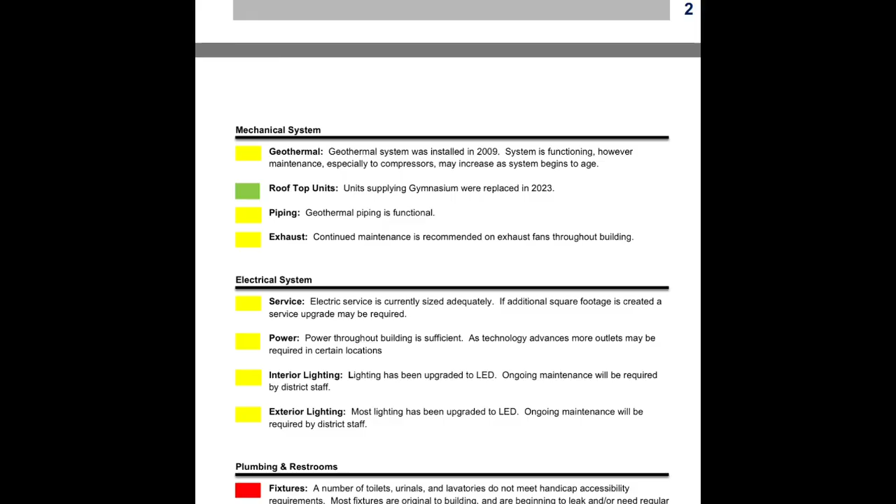Another helpful resource in the document library is the Facility Needs and Completed Items document. Again, from the document library, under the subfolder of Facility Assessments and Planning, we're looking for Facility Needs and Completed Items. This is an internal working document used by administrators and directors, and it's shared with the Board of Education on a quarterly basis. It tracks both remaining facility needs and wants, as well as projects that have already been completed across the district. That context is important.

This conversation is not beginning because the district has ignored its buildings. It is continuing because responsible facility planning requires us to keep addressing immediate needs and also looking ahead to longer-term questions. The completed list within the document varies in size and scope.

Some of the items are more routine. Others involved safety upgrades and equipment replacements, building improvements, and larger capital projects. Taken together, this document reflects the ongoing efforts to provide a safe, functional environment for students and for staff.

At the same time, completed projects do not eliminate the need for future study or work. The stronger and more accurate message is that the district has continued to maintain and improve its facilities while also evaluating whether or not a long-term solution is needed at the grade school, especially in light of a growing community and a growing enrollment.

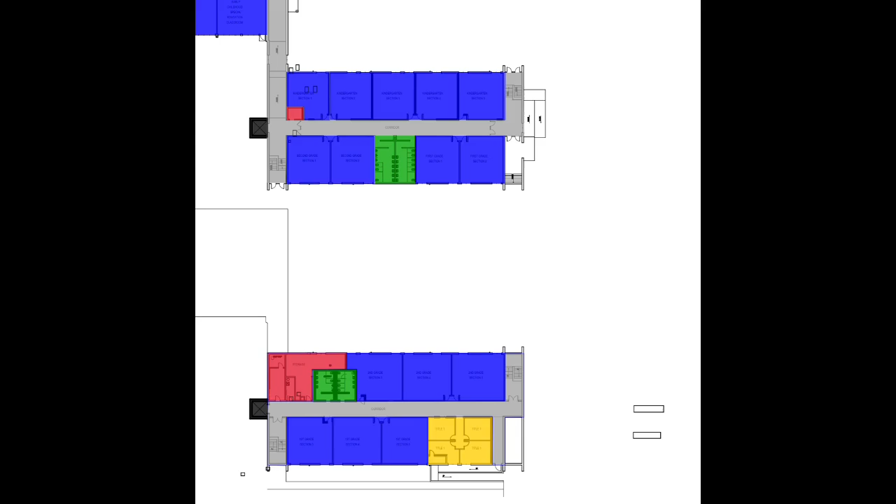In the top right-hand corner, you can see a color-coded key that helps individuals better understand the individual locations identified within the building.

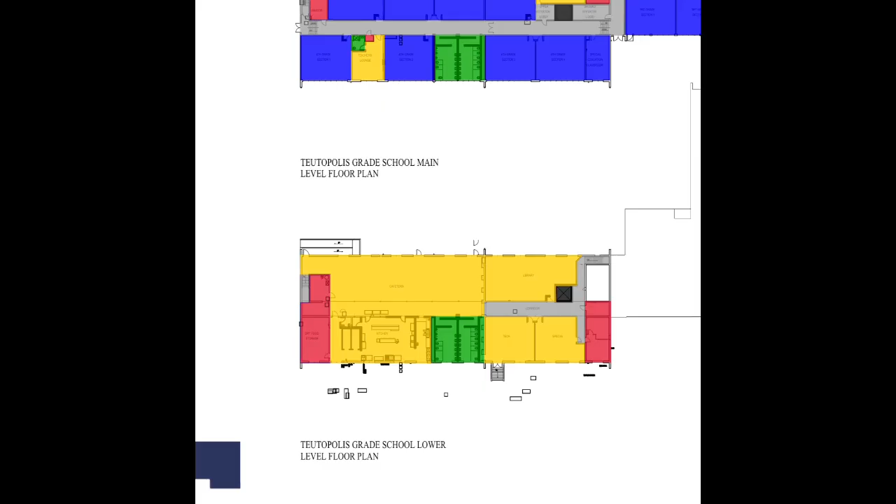This option primarily addresses spaces needing attention as determined through the district building assessment and prioritization document previously reviewed. It addresses restrooms, ADA accessibility including elevators, classroom space, safety, and building systems, namely plumbing, electrical, and water. Some areas would not be addressed and would remain largely unchanged. For example, option A maintains the existing footprint of the structure with no additional expansions and no renovations outside of the existing walls. The advantage of option A is that it would provide one possible scope for addressing needs identified while helping the board understand the cost and project impact. Its limitations are because of its narrowed scope. There are some needs that would remain outside of the ultimate scope of work.

The board has continued to study this $10 million option A because it provides a point of comparison against broader renovation concepts. Back within the document library, let's now select option B.

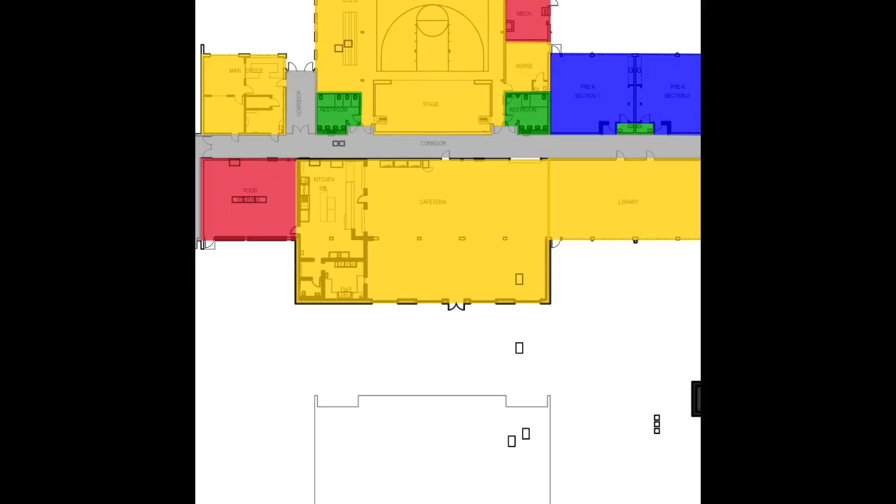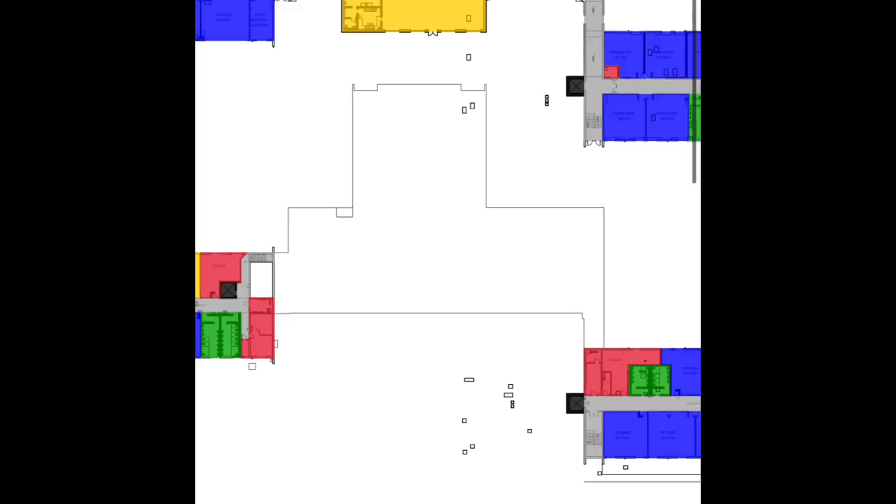Same color-coded key, similar building layout, but there are some modifications within this option. Option B includes all of the previously identified items discussed within option A, but it also relocates common areas to the center section of the building. If you look at this northern section or main floor section of the facility, it's currently used as educational classrooms. In option B, the cafeteria, kitchen, and library are relocated to the center section of the building. Classrooms currently located in this section are moved to the west end of the basement. That means classrooms, the blue boxes, would exist on both the upper and lower sections of both the east and west portions of the building, and common or shared spaces used daily by all students would be centrally located.

The advantage of option B is that it would allow the board and community to consider a different balance between scope and cost. The number of identified areas of need would be increased, but there would still be potentially some areas that would not yet be addressed. The board continues to study option B, an estimated $12 million project, and compares it to the scopes of work and costs in option A.

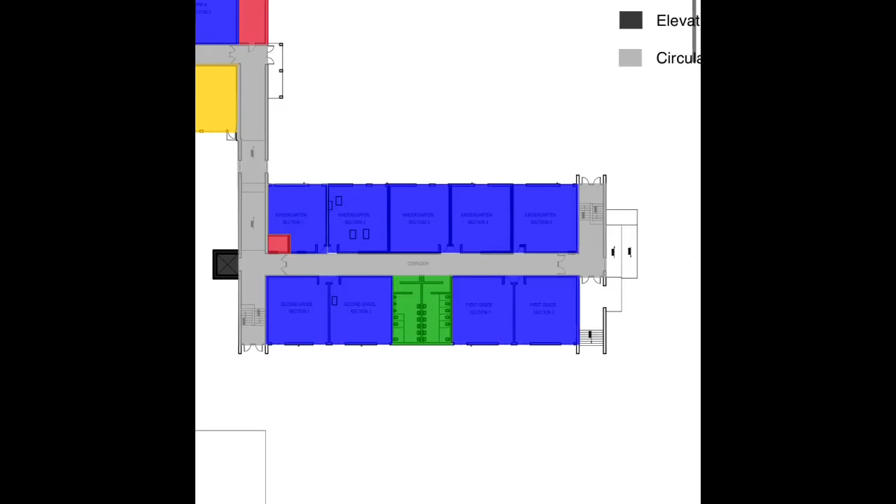Option C is also accessible within the document library. Option C includes all of the same scope of work identified within options A and B, and further expands the gymnasium and auditorium space. Like option A, this facility would include restroom renovation, classroom renovation, addition of elevators and ADA accessibility. It also includes option B's relocation of the cafeteria and library to the center section of the building, and now expands off the gymnasium east and west. This expansion allows for the existing restrooms to be captured and the auditorium and stage space to be expanded. This would relocate restrooms to the west in the existing office, pushing the office out towards the front of the gymnasium elevation. This would also allow for the creation of two additional classrooms to the east, currently identified as preschool classrooms, making it more convenient for early childhood and preschool students to access our facility.

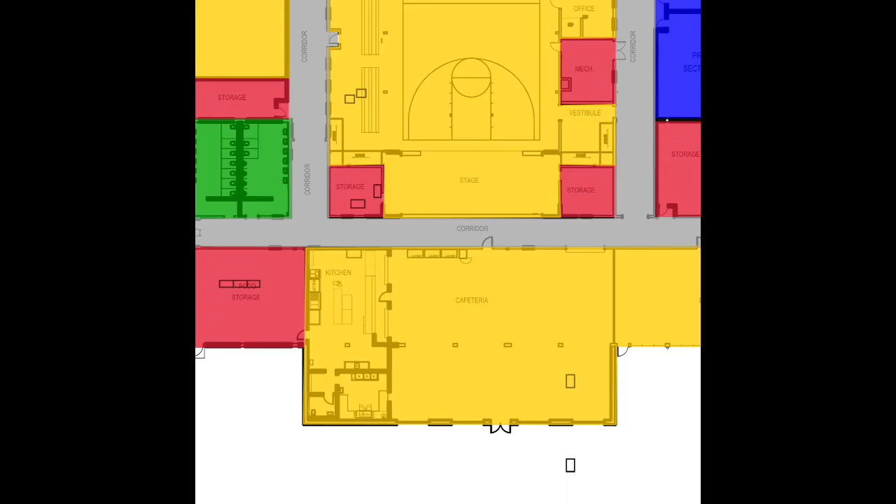Admittedly, option C comes at a cost. It does expand the existing project and scope of work, but at an estimated $15 million price tag. The board continues to study option C because it helps frame the full range of possibilities being discussed, but must also consider affordability, timing, taxpayer impact, and future generations of Wooden Shoes.

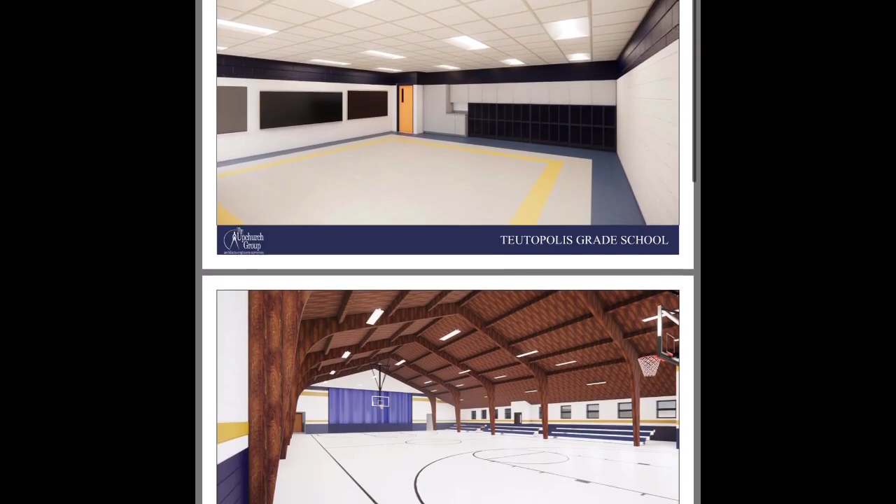Another resource available through the document library is the renovation renderings presentation. It too is accessible under the grade school options and visuals, entitled TGS Renovation Renderings. The renderings are visual concepts. Their purpose is to help families and community members picture how renovated spaces could look if the board moves forward with one of the identified projects. Depending on the slide or image, the renderings may show possible classrooms, restrooms, or shared spaces like the cafeteria or auditorium. It's important to be clear about what renderings are and what they are not. They do not represent a final selection of materials, colors, furnishings, or design details. They are not a final approved plan. Their purpose, rather, is to help the public visualize the possibilities and better understand the types of spaces currently being discussed by the Board of Education.

Before we close, I want to return to the importance of community feedback. As the board moves further into the public impact portion of this discussion, the district is expanding opportunities for residents and families to ask questions, share concerns, and identify information that may be needed for further clarification. Community members may contact me directly at the unit office, email the Board of Education, attend an upcoming Clearview community conversation, or submit a message through the community engagement section of the Clearview website. The purpose of these opportunities is not to advocate for a particular outcome, but rather to answer questions factually, to hear community priorities, and to make sure the board has access to feedback as it considers possible next steps.

We continue to encourage families, staff, and community members to explore the materials here at the Clearview website, to ask questions, and to remain engaged. Thank you for taking the time to review our document library and for staying informed about these important discussions. Thank you, and go Shoes.